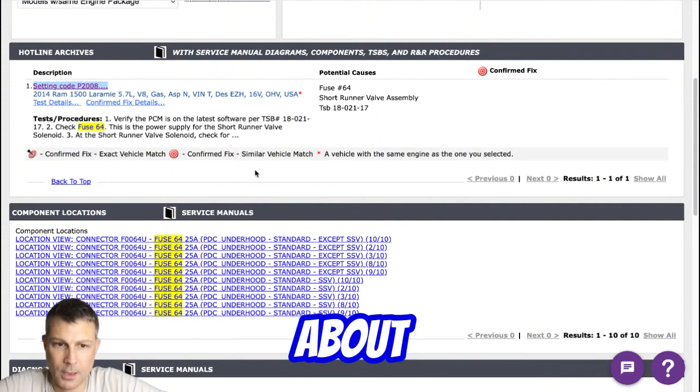It pops again. Even at the very onset, if I drive it 5 to 10 miles, I'll pop that fuse, replace it, drive another 5 to 10 miles, pop it again. And this morning I got online and I talked to Alan. Said, well, it's most likely the SRV, the short runner valve. And I said, well, how do you test that? And he's like, well, you just have to unplug it and drive it. And if the fuse doesn't blow, then that's defective.

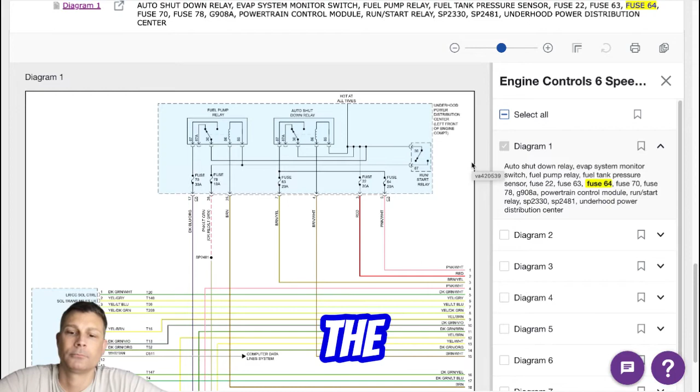And I'm like, well, you can't get to that valve. It's on the back of the intake manifold on the right side, and it is buried underneath there. You can't even see any cables. You can't see the valve. And the valve, if you look at the valve in the schematic, or in the diagram, its plug is downward facing. So it's below the map sensor underneath the manifold on the back, and then the power cable, even if you could reach it, you'd have to push it downward to disconnect it and then there's absolutely no room on the back of the 2014.

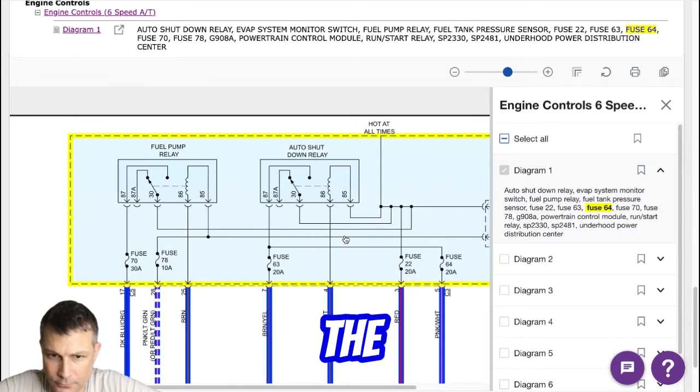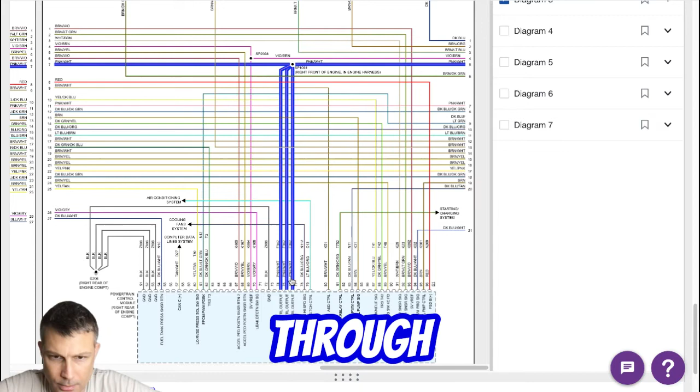The difference between my 11 and my 14, they pushed that motor way far back into a cove underneath the apron or by the windshield there, and there is no room. I would literally have to pull that manifold off even to check the SRV, and I'm just wondering, is there a way I can test it before I go through removing all of that hardware? I'm not getting any codes. That's the thing. The fuse pops. I don't get any codes, nothing.

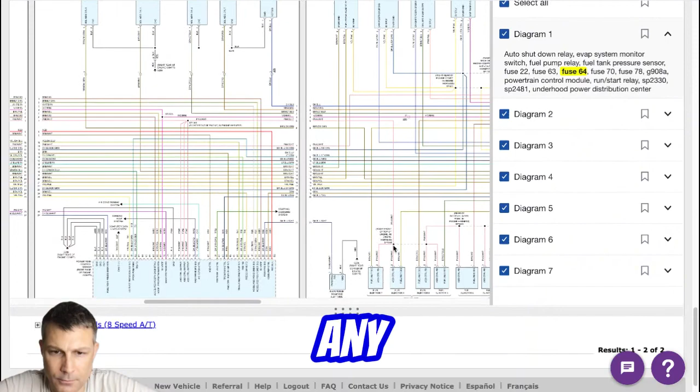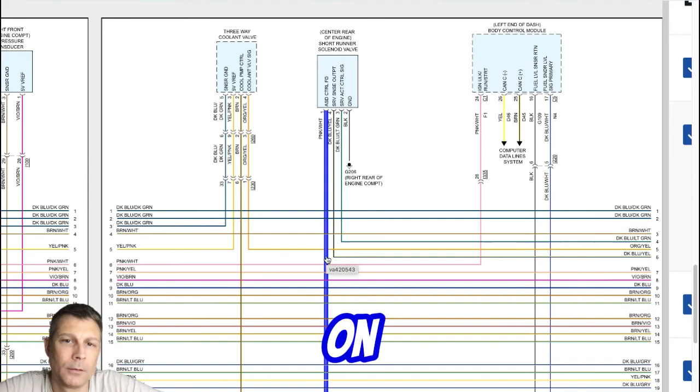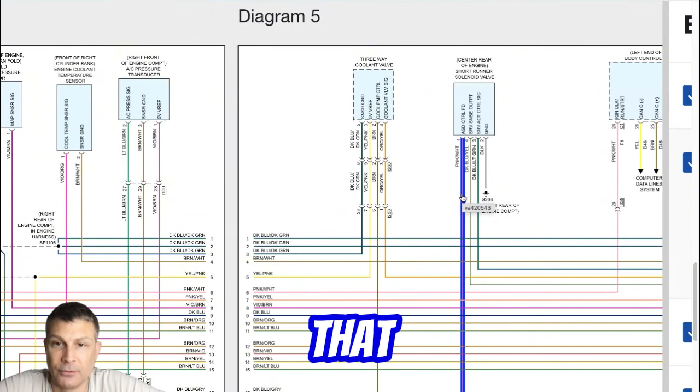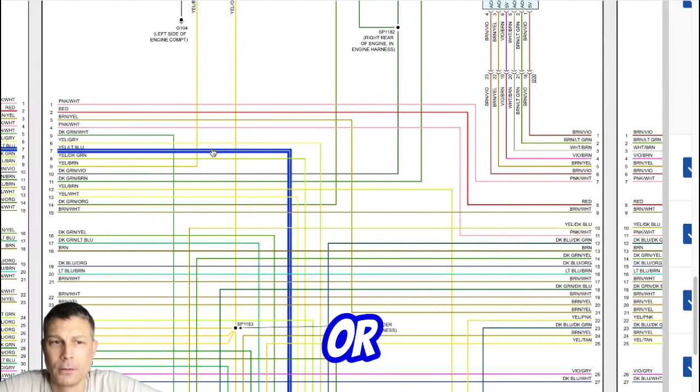So the only way that I know how to test it or check it without actually unplugging it would be to use a scan tool. Mm-hmm. And you use a bidirectional control, and you would basically just activate that short runner. I think I can activate it, although I don't know. I may or may not be able to activate it because most of the scan tools I've seen, and I've been looking them up because I figured I'd just buy one, because it'd be a lot easier than pulling the manifold off to test it, but none of them list the IMRC or the SRV as a component that they can actually test.

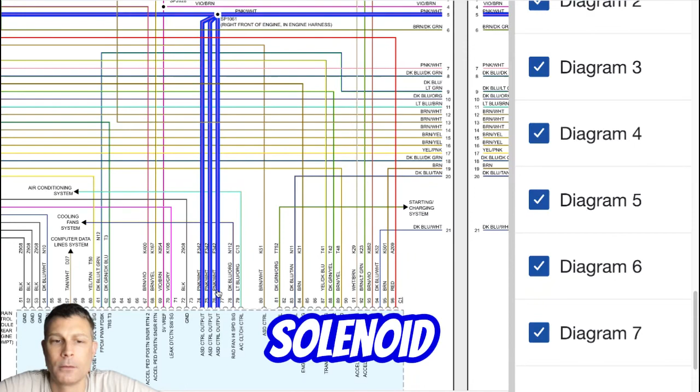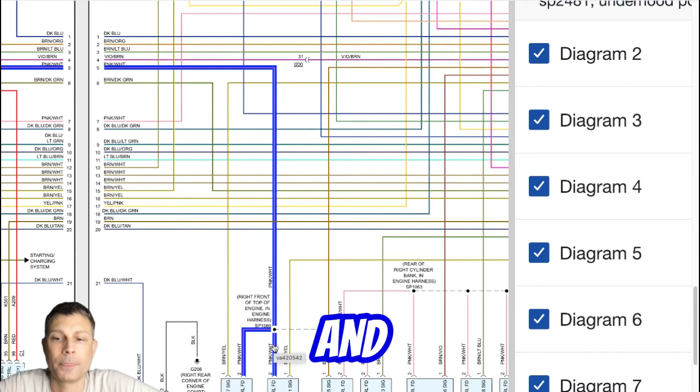You can test a lot of things. You can test all of the occupant restraint controller and the BCM and run it through its paces, but I did not see it on any of the scan tools out there that you can literally scan the short runner solenoid valve. It goes to ground on the engine block, but it's also got 3 other cables. Now I know the pink and white is the circuit that it's powered off of on 64. And I thought, well, if I could just isolate the wire going to it somewhere in the harness I could reach easier, I could cut the wire. And if it suddenly stops blowing the fuse, then I would be in good shape. Of course, I'm going to get codes, but it would definitely be something of that nature.

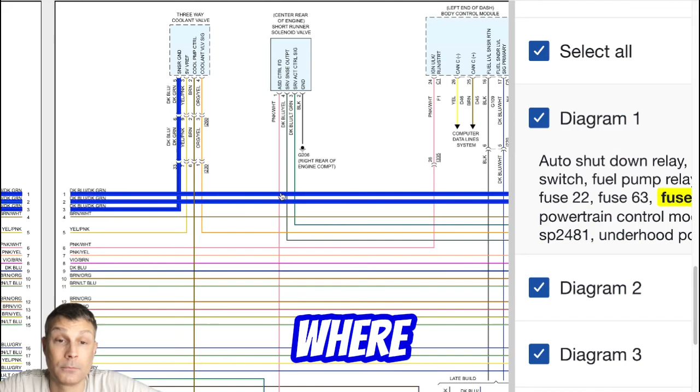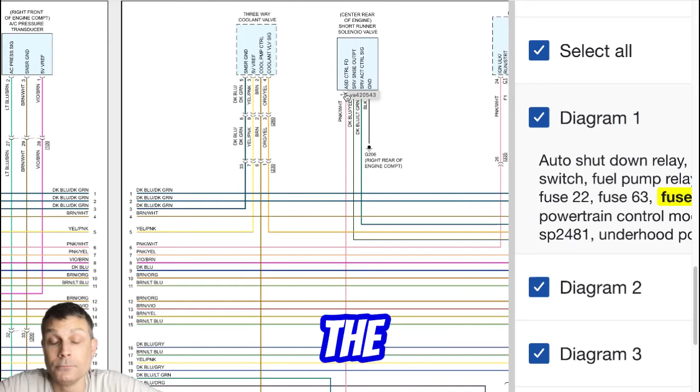I just don't know where in the harness to find that pink white wire, and I don't want to cut it where it's a branch circuit; if I cut power to that, I cut power to the injectors as well, because it goes to that and then it branches from that to the injector. So really kind of crazy, man. All this electronics hardware, the fuel injectors are powered from that controller to the injectors. That's why if it is bad and it's causing the fuse to pop, it was to disable the fuel injectors.

So this is the stuff that we deal with every single day at the shop. Every day.

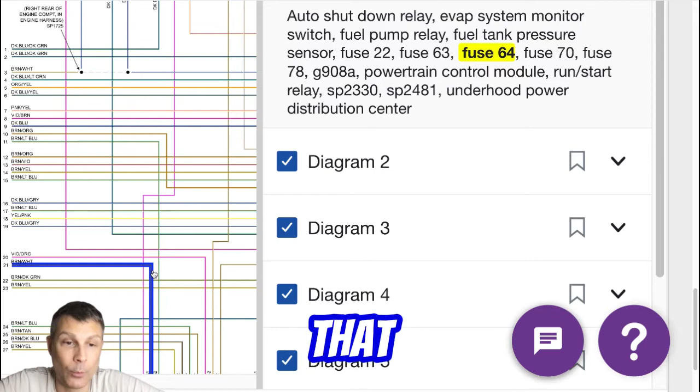So here's the thing: you got two options. You can pull it apart and disconnect that short runner valve, unplug it, or you could just simply spend lots of time tracing down that wire that runs from that fuse over to that short runner valve, and then the injectors. That's it. So I would try to determine which one's going to be easier to do, and then do that.

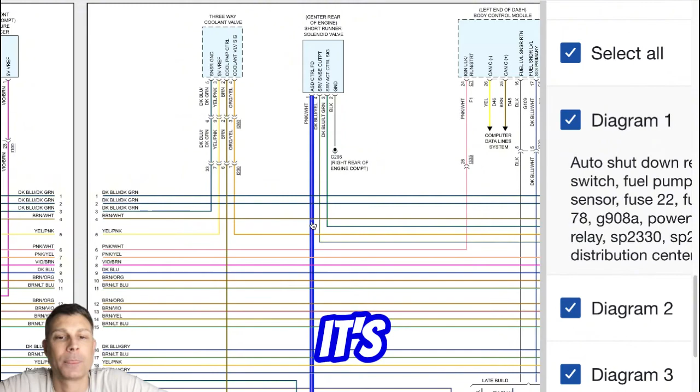Well, the fuse is the wire going to the fuse. Look at that circuit again. Luckily for me, I have the schematics. It's crazy, but it's better than not knowing where these wires go. And I'm just trying to make sure I understand where this is. Oh, I need to go to the fuel control system one. There we go. Fuel control system doesn't show the circuit, correct?

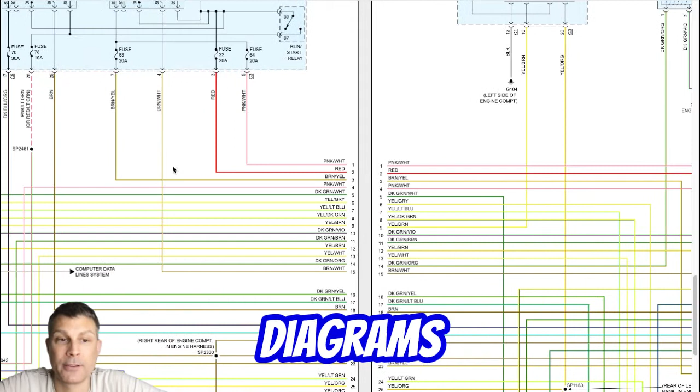What's that? I'm sorry. Say that again. You already have all of the wiring diagrams for the circuit. I have every diagram ever known to man on this vehicle. I have the fuel control system. I have 100% all wiring and all of the pinouts for the C1, C2. And it's a nightmare because everything

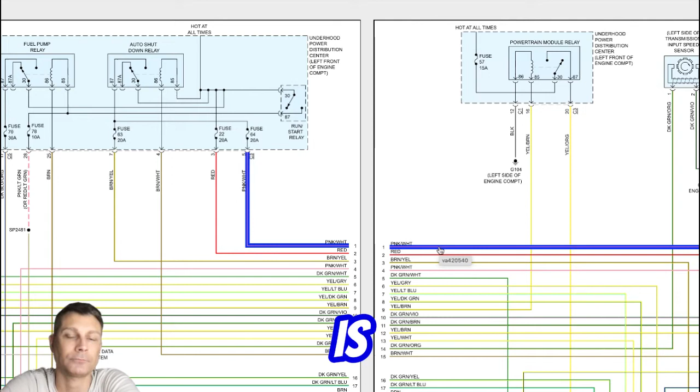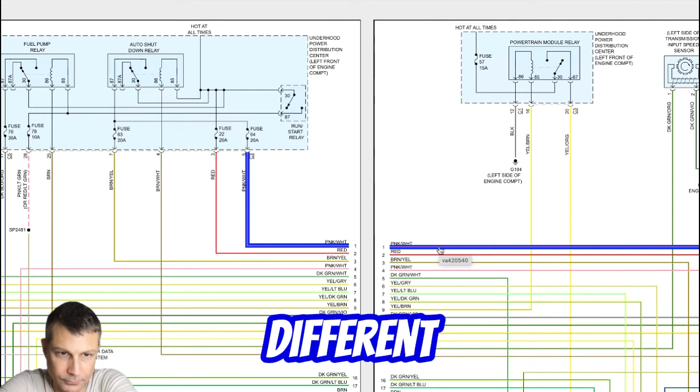Fuse 64 is coming off the auto shutdown relay. The circuit that's hot for that is coming off that relay, and I've replaced that relay with nothing. But it says it goes to an ASD control output on C1 on 74, 75, and 76, but it doesn't say what that control output is for on three different C1 connector pins, and they're all there, but it does not show on this schematic.

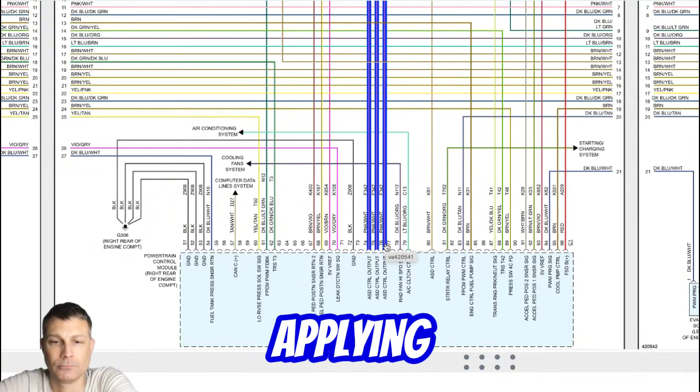It shows the feed going to all of the injectors, and then the injectors report back to the PCM on their individual control circuits, because I believe it doesn't open the injector by applying power to it. It removes the ground at the PCM, and when it needs to fire that injector, it just re-enables the ground. And the fuel pressure sensor, but it doesn't show anything because that wouldn't be fuel system, that'd be air control system. So I have to go back to the master schematic, which you've probably seen. They're pretty intense.

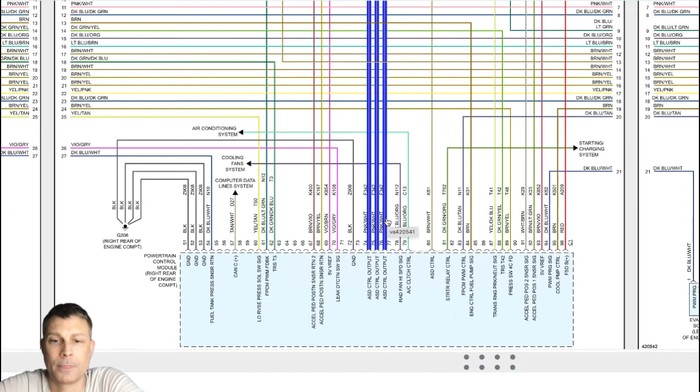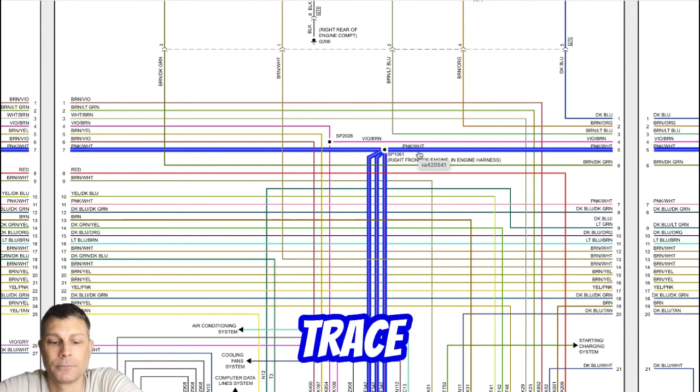And that just shows the same wiring, but the way it shows it branching off, if I cut that wire, I could definitely disable the fuel injectors and wouldn't solve any problem. I would have no power going anywhere in the circuit. So in order to unplug that, I would have to trace that wire from the plug up to a point where it's not going into the main harness and back to the injectors. So obviously it has to be powered independently of the injectors. It would have to be.

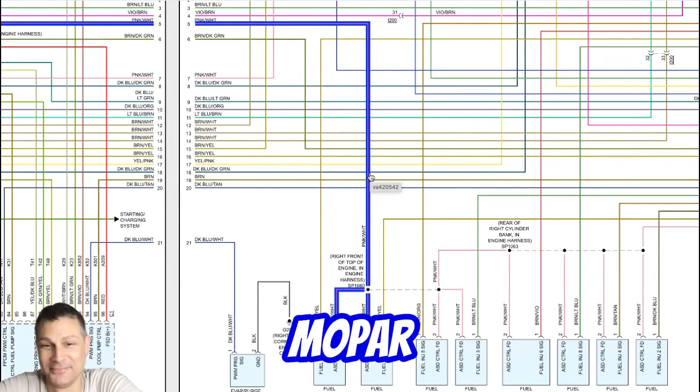And this is crazy. Why would you put this thing on the back of the motor? Every other truck I've ever worked on that was a Mopar, the solenoid is on the front of the motor on either side of the heads, excuse me. There's no way I can test it without pulling that off. There's no way I can do anything without disconnecting that.

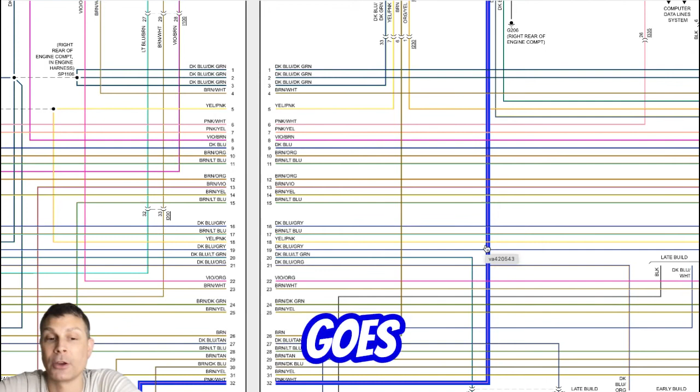I suppose if you could access the wire that goes to it, maybe a foot or 2 feet away from it, so it's still past the injectors, and then just literally cut that wire. If I could cut that wire, if I could find it. You start unraveling looms and stuff of that nature, and how many other wires are going to go south on you while you're doing that. But I have no other codes.

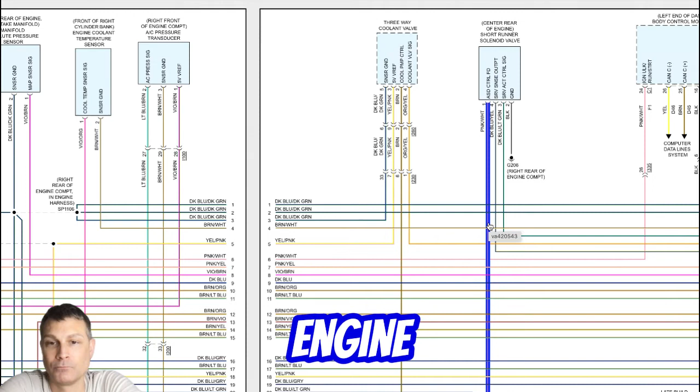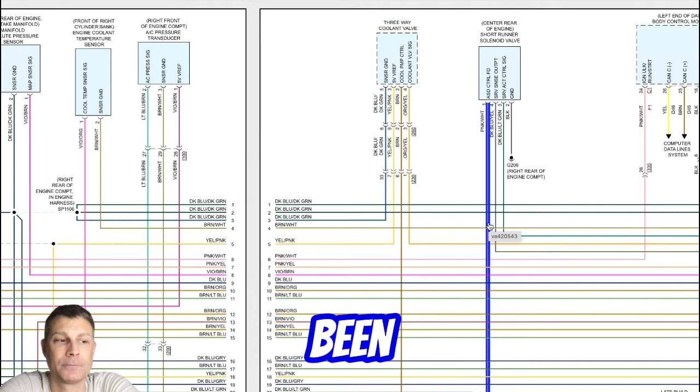I'm running an engine in this vehicle that has the MDS disabled. It was built to be a non-MDS engine, and it runs great. It gets great gas mileage even without MDS. But those are the codes I have because it's showing that it's been deactivated. It codes out and says the MDS solenoids have been deactivated, for each one of the MDS cylinders. But other than that, it runs great.

It's 14 miles to the gallon, even with my lead foot. But this is killing me, man. This is driving me nuts. I have read out every wire going to every fuel injector.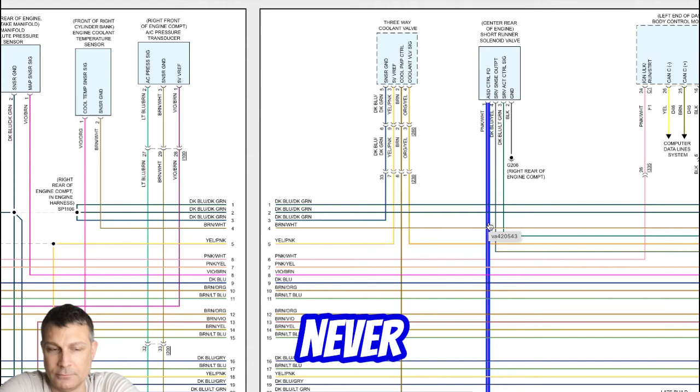I've even tested the resistance on the fuel injectors and everything of that nature, and I just can't believe it would be this stupid sensor. I've never even heard of this thing before. And I have exclusively fleet Dodges, man, starting back in 2005. So they're all the newer Dodges, or supposedly better Dodges, and they were all Hemis. And like I said, I've never encountered this before.

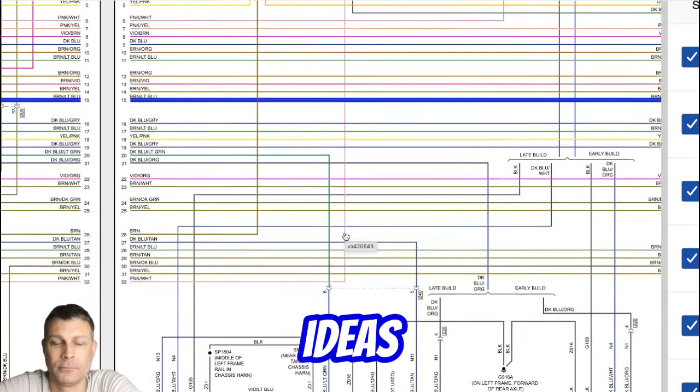So let me trace out that pink and white wire. Let's hope they maintain the integrity of the color coding on the wiring diagram. And let me see if I can cut it. I would not know if it's going to that plug or not because I can't even see it. You got any ideas? Can you get to it from the bottom? I don't really think. I don't know off the top of my head. You have to look. Whatever's easiest, top or bottom, just go that route. And if you can't unplug it, then maybe you can just follow a harness, maybe 12 inches, 24 inches away from that little valve, and if you can, just cut it, hopefully.

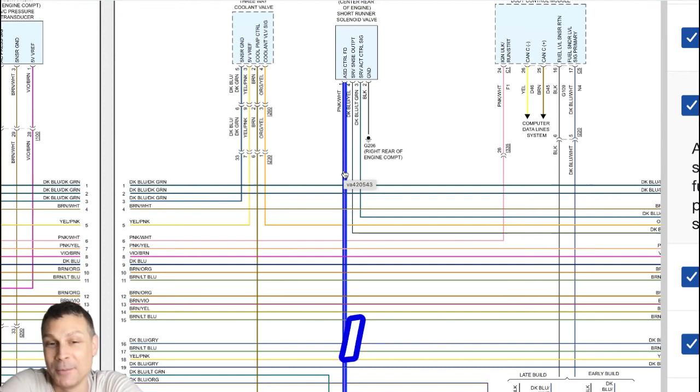Normally, that's not something we would do in the shop, but we would just get authorization from the customer to pull it apart. If they don't want to do it, we would just tell them to come pick it up. But I don't mind pulling it apart and replacing that solenoid, but how do I know if I do that and it doesn't fix it, then I've done a whole bunch of stuff for nothing. It's not that big a deal. Right. I pull the intakes on the Pentastars all the time. Hey, got to do a tune-up. Take the intake manifold off first. Oh, oil change. Take the intake manifold off because it's not that hard.

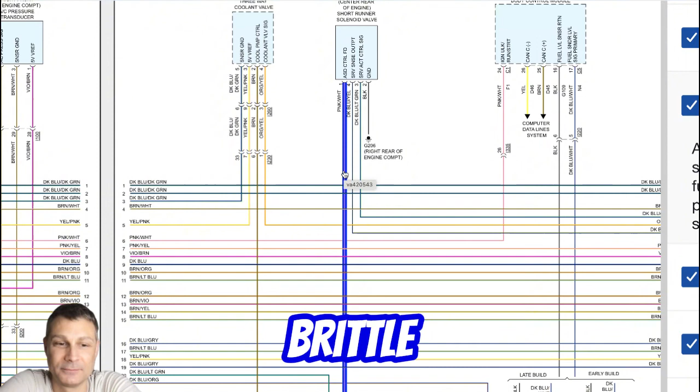I just want to know if there's an easier way, and there is no. The only way, you'd have to find that wire about 24, 36 inches away from that valve and just cut it. That's the only other way to test it. And to be honest with you, I'm very apprehensive of cutting a wire on that loom on this old of a truck. Gotcha. So then pull it apart. Those are your options, my friend. Every single connector on that is missing the red lock piece on it because they're so old and they're so brittle. And so I'm going to probably just pull the manifold off of it. It's not my daily driver right now because I can't. So I'm going to pull it in the shop and start pulling that manifold off.

I got to finish a Dakota rack and pinion and figure out why all of the oxygen sensors are reporting bad circuits. But I'm pretty sure it's a ground. So they all ground to the same spot.

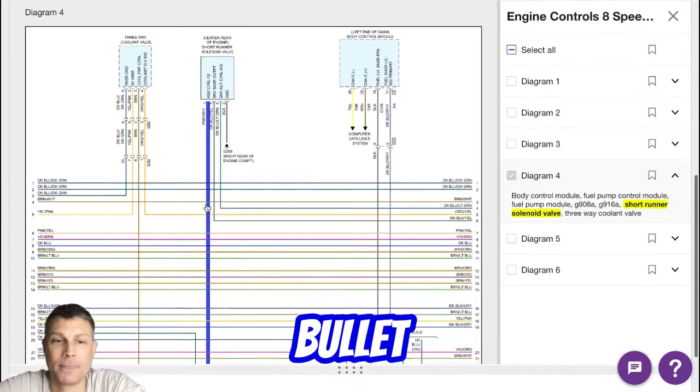So anyway, it's been a pleasure talking to you. I figured that I had to just bite the bullet and pull this off and go through it. But it does make sense that it would be that sensor or that valve, that solenoid, because it's blowing that circuit. Because when I'm driving, it's adjusting airflow and mixture, so that thing's opening the runner and changing the airflow dynamics. So it would make sense if it's not right or it's jamming up somewhere, unless there's something in the manifold causing that solenoid to jam up. But I can always apply 12 volts to it when it's out and see if it moves, if it's not making any crunchy noise, because it's basically like a stepper motor type of thing, right? It just turns a little knob that opens and closes the runner.

Back and forth. So, all right, man, I appreciate it. I just wanted to validate that because, man, there's no way to get to that plug. And you know what? I think the Dodge designers need to stop doing Coke or something. They're just incredible. I agree.

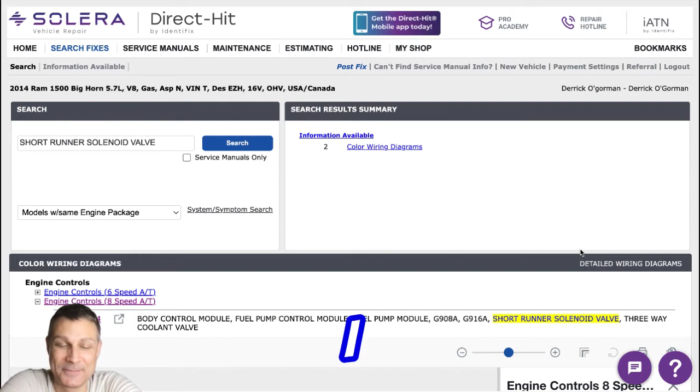Buddy, you just get authorization. What's the book rate on an R&R of a manifold on a Dodge? What, 2 hours, an hour? Something like that. That's not too bad. It's not like doing the transmission service on that thing. It's 2 days. Right.

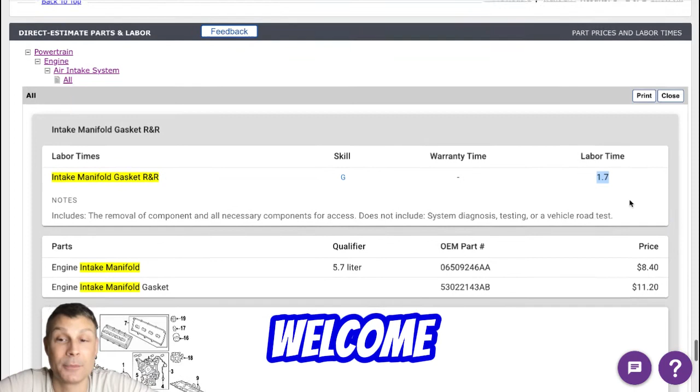You got it. Post that, hey, you got to pull a manifold to get to that valve and there's no way to test it unless you cut the wire. 1.7 hours labor on the intake manifold or a gasket, I suppose. What's that? Say that again, please. It says calls for 1.7. It's like 2 hours. So, you know what? That's not incredibly bad.

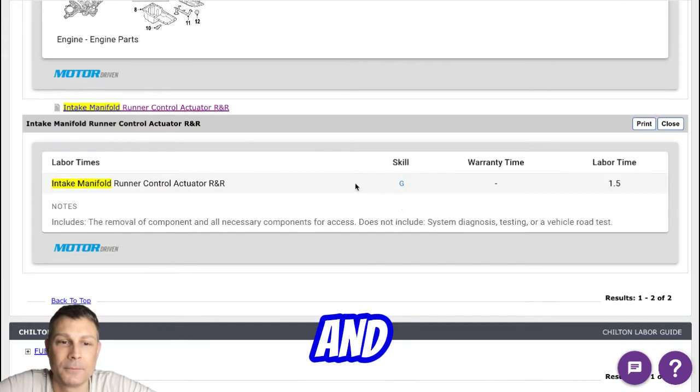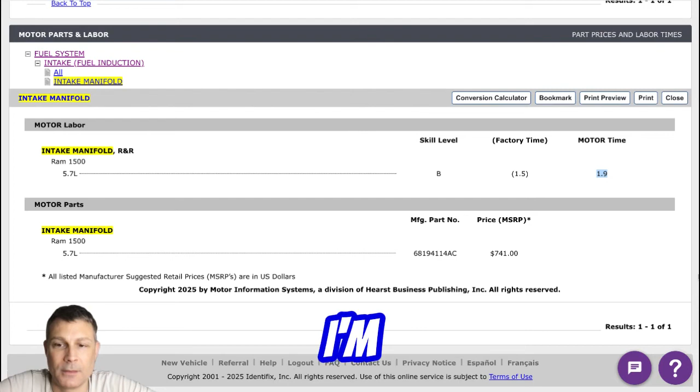And they always are very gracious with their time. And so I'm figuring probably about an hour to get it out and put another one back in if I hustle on it. But that's not bad. It's not going to take me 4 days to get it all out and do everything of that nature. So I'm okay with that. Anyway, I need to order a gasket set that has the O-rings.

Yep. And you're not aware of any technical bulletin to replace that manifold because it's a plastic one and they warp or anything of that nature? I got a tech bulletin on Fords that you have to replace the plastic manifold with a different manifold that they offer now, which has got more rigid plastic. There was a recall on it.

Good question. That I don't know, but it looks like there's a technical service bulletin about a PCM software update that sets a code P2008 that would blow this fuse number 64. Although you're not getting the code, so this TSB may not apply. If you want the number, I can give it to you. It's 18-021-17. 21-17? 021-17. Let me look that up just in case.

Do you see a software version number on what it is and what it should be? Because I can look at my version number and tell you if I need the upgrade or not. I do not see it. No. Yeah, I'll look it up. It might say on that TSB, on the bulletin.

See, I was debating whether or not to change out the PCM as well, because somebody who worked on it broke those lever operated latching diabolical connectors they put on them. Obviously the guy must have leaned on it or tried to move it without soaking it in WD first to get all of the debris out of it, and he broke the frame around it. He didn't break the lever, which is normally what I see. He broke the frame around it, and that would require cutting that cable off and reestablishing all of the connections by soldering or some other mechanical means for every single pin.

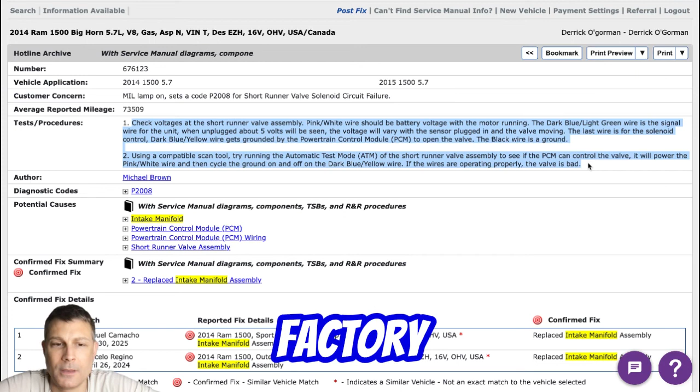And I was thinking to myself, that is just asking for problems, because outside of the factory there's no depinning tool. I have the block and everything here and all of the wires. And of course, all of the wires with pins on them come in one color. They're purple. And I'm like, there's no way I'm going to be able to do this. There's no pin removal tool to repin a new block with a new frame, and there's no way to replace the frame around it.

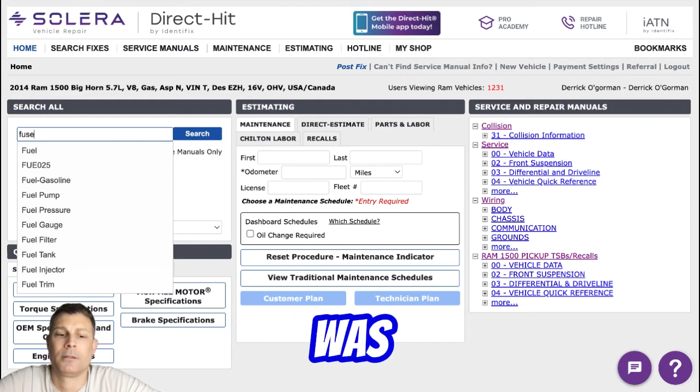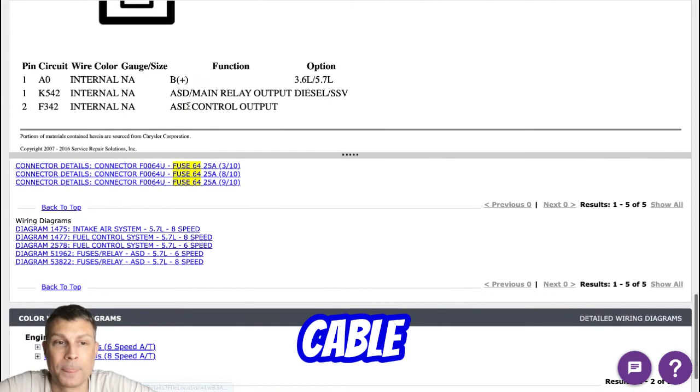So I broke out the JB Weld and some stainless steel wire, because it was the latch on the top that wouldn't let it seat all the way. Even if you push down and lock the lever, it would push it right back out of the PCM. And when I did remove that cable, obviously it had been loose for a while, and there was a puddle of water in the bottom of that plug on the PCM. I was like, wow, that might have done some damage. I saw a bit of corrosion on the pins.

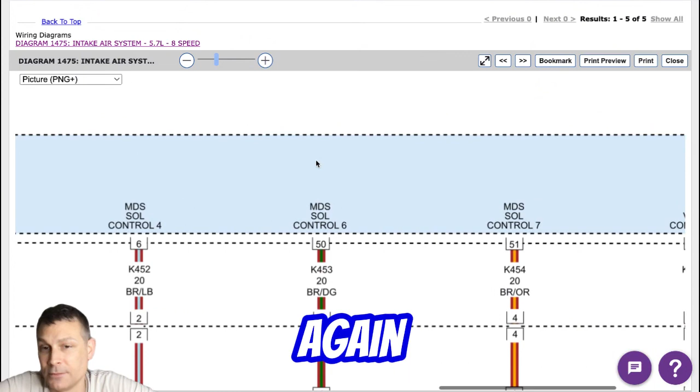I cleaned it up as best I could, but I rebuilt that connector, and it now latches. I'm just very careful that it doesn't happen again with somebody going in there and trying to meat hook it, because those things are very delicate. And it's a good locking mechanism. You just got to clean it before you try and operate it, because it's got those teeth and gears in there, and they have to slide on those pins. It's a positive connection.

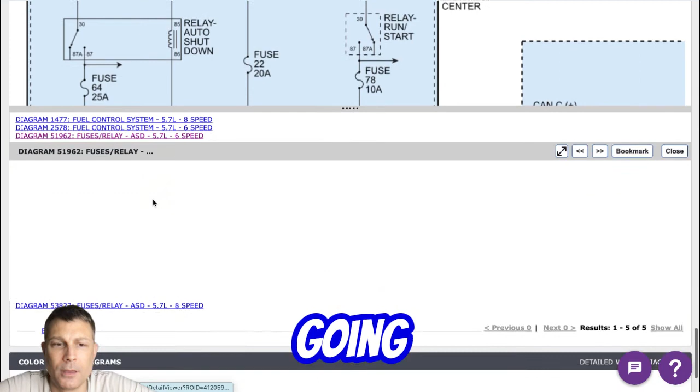And like I said, I have Dodge 1500 Rams going back to 2005, and I see all of the changes going up to this 2014. And I don't think I'll purchase anything past 2014, because the electronics in there are just crazy, man. Everything in that truck. You get a burnt tail light and the truck won't start.